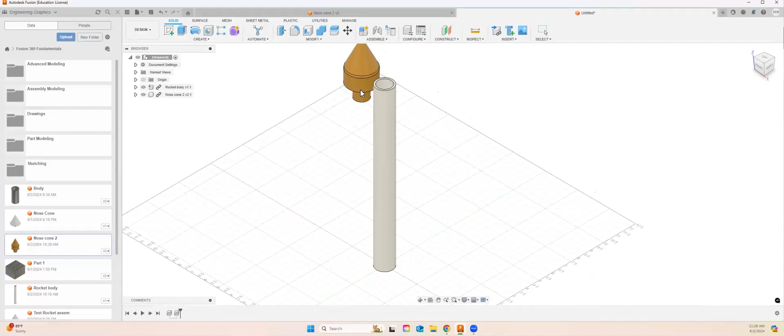And you can see I have my two parts now. So let's say I want to put this inside on top of this. So I need to do some joints. This is where we're going to use this control again, right? The assemble parts right here.

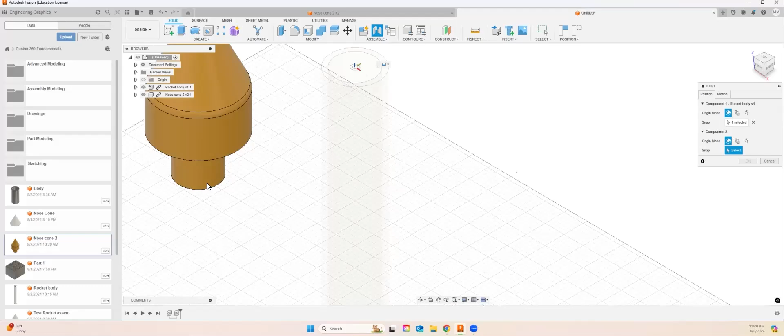And then we're just going to press on joint to join these two parts. So if I go here to joint, I will select the inside of this cylinder, and then the next one, the outside of the cylinder, like that. Let's see what it's doing. So we have motion, so it's gonna be rigid, where it's not gonna move.

I think in this case we want cylindrical. You can see, yeah, so it can move in that axis. So it's gonna show like a little preview.

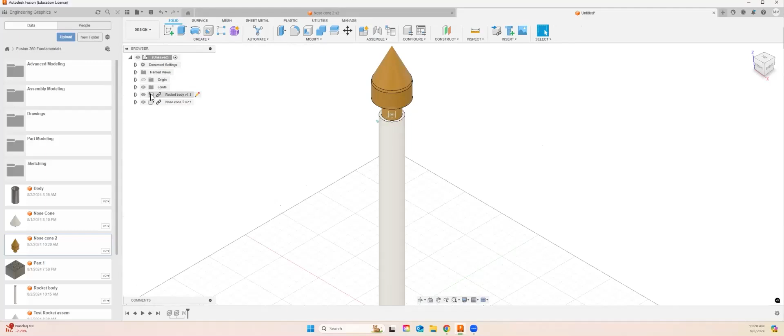Okay, so you can see it has this little anchor right here for the rocket body. That means this part you cannot move, it's anchored to the floor. But this one you can, and you can rotate it around and so on.

So we have more fins, we can do that. There are other joints that we can do, and a bunch of other videos that show you. For now, I think this is all you need.

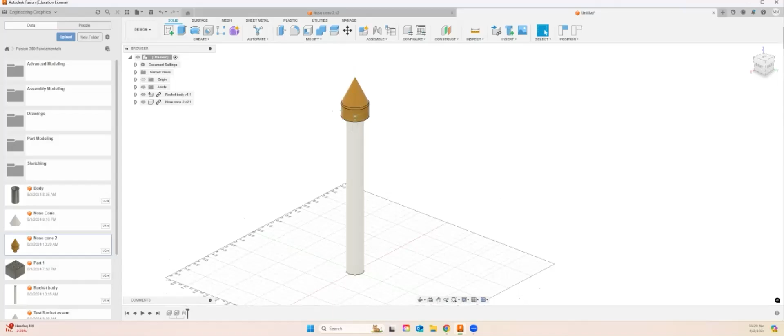So look, this is my rocket. If I have my fins, I can start also mating them here with different kinds of mates, and then I could have my full rocket assembly.

So this is how you start an assembly. You make two parts, and this is pretty much what it is. You can of course lock some of this and so on with physical constraints, but for now, this is just a simple way so you can start doing your assemblies.

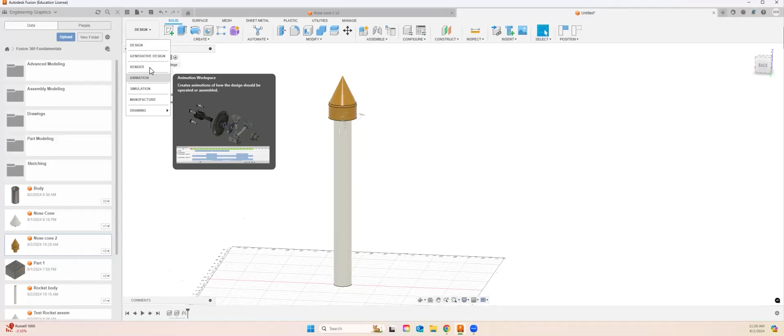So let's say you want to do this, so we can go probably to simulation to check some stresses, or maybe in render, you want to make a realistic design. There's other things that you can put, but yeah, it's just like, oh, look, this is how you can turn your things around, and you can see like, oh yeah, this is your design, right?

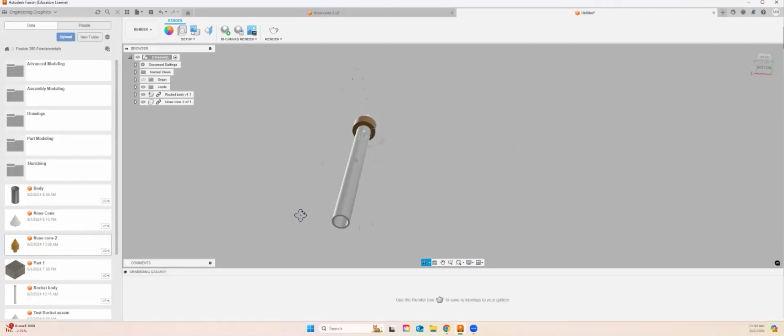Like you're rendering this, and this is your rocket, and this is already in motion and so on. So I'm not gonna get into detail into this. This is just, once again, a brief overview, but it's something that you guys could try if you want to do this at home or later.